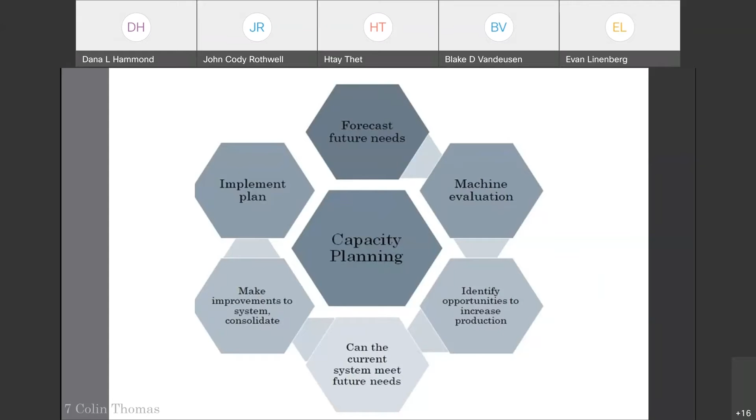So when you have that, you're able to come up with some improvements, whether that be on the engineering side, supply chain side, or operations side, to be able to meet those future demands and make sure you're meeting your customers' expectations. Once you do that, you can implement your plan into the system and allow your capacity plan to track how well those changes are helping to meet future demands.

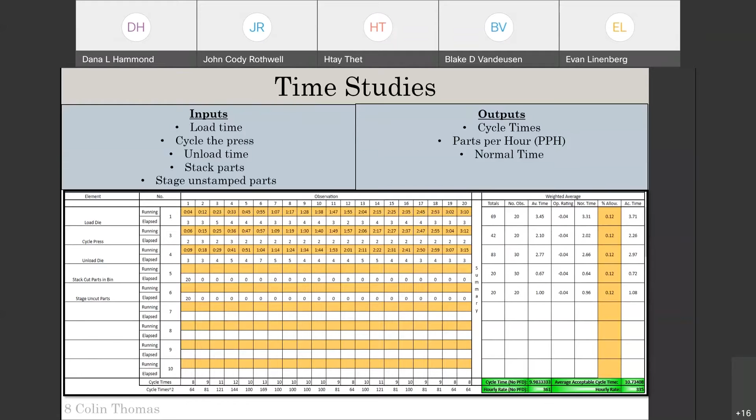So to begin building our capacity plan, we started with our data collection, which was the biggest part of our project. So we started by collecting time studies. A time study is a tool used by companies to evaluate how long it takes a machine or a person to finish a piece of work. So in our case, we were evaluating the 5 manually fed presses at Bradford White.

To get accurate times, we broke this work up into elements. These elements included manually loading the pan into the die, cycling the press, and then unloading it. These had to happen every time a finished part was completed. And then also stacking and staging of finished and non-finished goods. Those happened less frequently, so they had less impact on the overall cycle time.

So once these were broken into elements, we collected times with stopwatches and videotapes. These were plugged into our time study table as shown right here. And this gave us a good look into how long it took to complete each element. Since these are manually driven operations, this was very important. We also incorporated operator ratings and percentage allowances for the work environment and how hard the operation was to complete.

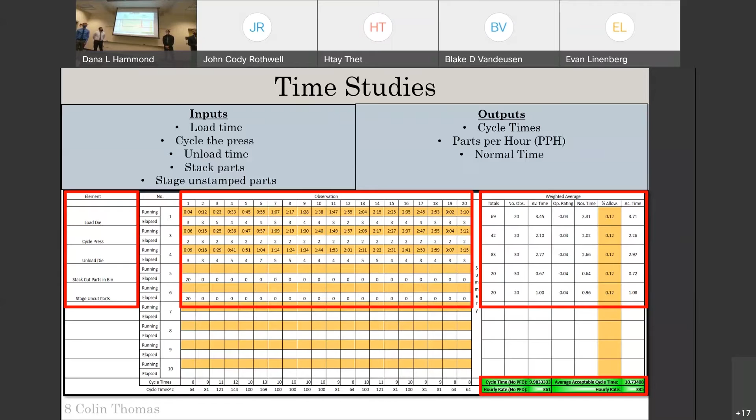So once all this was plugged into our tool, we were able to get cycle times and hourly rates for the over 100 parts that get run on 5 presses that we're looking at. More data that we need to collect.

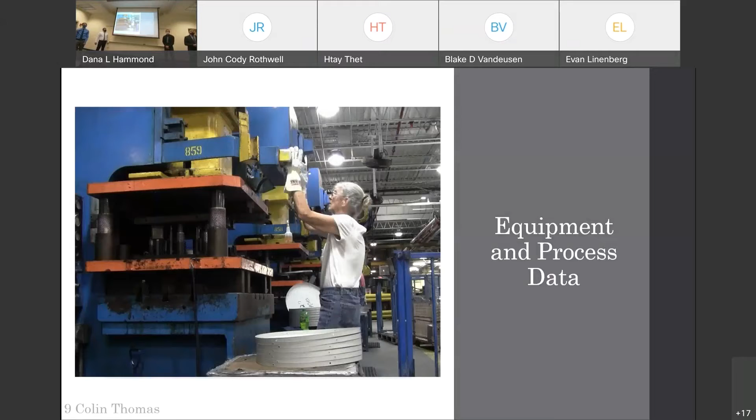Started off with some critical machine information. This is a picture of the manually fed presses that we're looking at. We had to collect data on the size of the machine, what dies can be run in the machine, and how many strokes per year the machine sees.

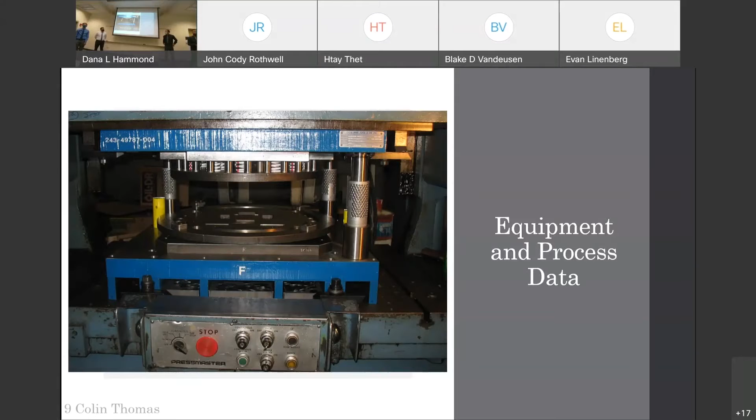And when we refer to tooling, we're talking about die sets like these ones right here. For the tooling, we had to collect the size of the tool, where the tool can be used, and what parts come out of each die set we had to look at.

We also had to look at how many people were available to run these presses. So Bradford White runs a 3-shift operation in their stamping department. On first shift, there's only 3 people available to run these 5 presses. This means that only 3 out of the 5 presses can run at one time.

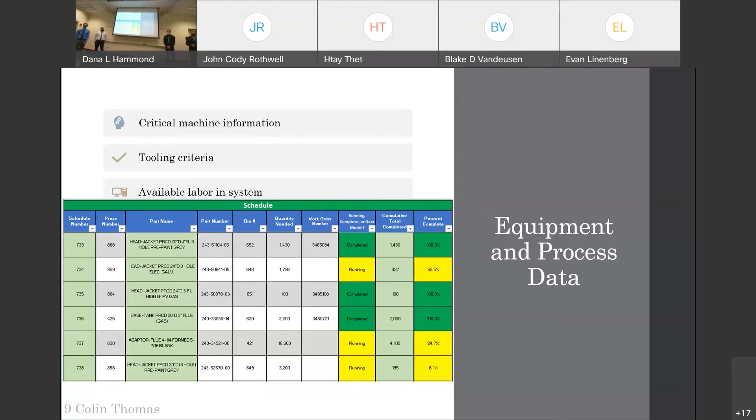Nick will mention this later, but as most of you know, finding labor in this environment is fairly hard. Second shift and third shift only have 2 operators available to run these presses. So we had to dig into old schedules and old production reports to see how well they were able to meet the needs of their schedule and how fast they were able to run certain parts.

For our capacity plan, we used the 2020 volumes seen by Bradford White, but we also forecasted into the future for growing demands to be able to evaluate if our systems could meet our growing demands.

We also obtained quotes from outside manufacturers when we started to look into outside processing, or OSP. OSP is when one manufacturing company has another manufacturing company make parts for them and bring them back to them for final assembly. So we got quotes from other suppliers for that.

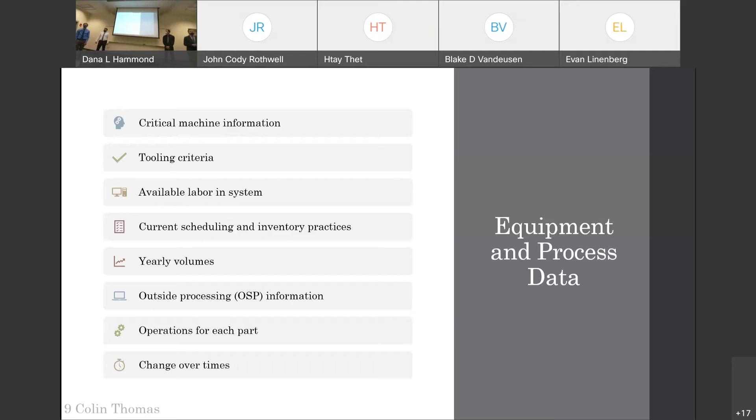We also looked into operations that it took to complete a head and base pan. These head and base pans may look simple, but some of them take up to 5 different stamps in a press to be able to use as a finished part. So that all played a role in how long it takes for a finished head or base pan to be completed.

So with all this data, we really needed a way to organize it so that our team could use it. So we built a matrix Excel tool to be able to filter and organize this data as we needed it. It also allowed for greater visibility as we started looking at improvements that we could make as we started to build our capacity plan outline.

This matrix is being used by engineers at Bradford White currently to work on other projects, as the manufacturing standards involved are very helpful. So as we start to put together our capacity plan outline, we spent a lot of time doing research on what other companies are doing, how it's being helpful to them, and how we can form it into the unique system that we're looking at at Bradford White.

So to begin that, we gave press and die assignments for each part to be able to organize it that way. And then we brought our capacity plan outline to Tim Cross at Bradford White for them to evaluate it. Tim suggested that we start to look at targeting an 80% utilization across all 5 presses. 80% seems low, but there's a few reasons that we do this.

It's because of emergency changes at the assembly lines. If we need to change our schedule in the press room, it gives us extra capacity to be able to meet those demands. And then also the 11th hour customer: if we have a customer come to us late that needs parts now, in 21st century manufacturing that's very important, and we need to meet those customer demands. Now I'll give it to Nick to talk more about our utilization rates.

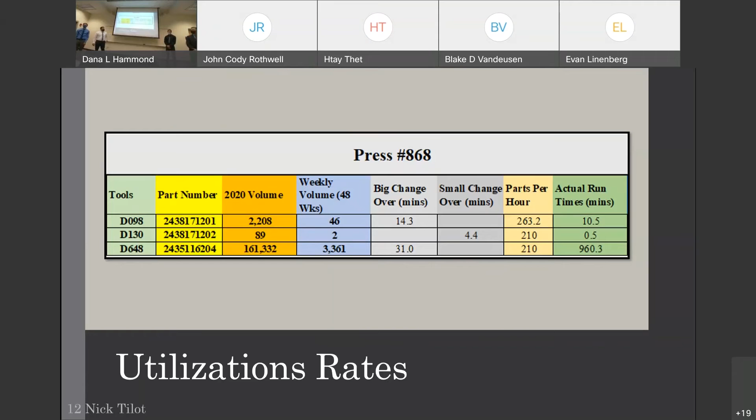We use this data to start calculating our utilizations. The first equation we had to use was the available runtime. This is the number of operators multiplied by the available runtime per operator divided by the number of presses that were in use at the time.

We then use this to solve for the utilization rate. This was the weekly volume divided by the cycle time, plus the changeover time and preventative maintenance. This is all then divided by the available runtime. We use these equations to find the current rate at which Bradford White was currently at.

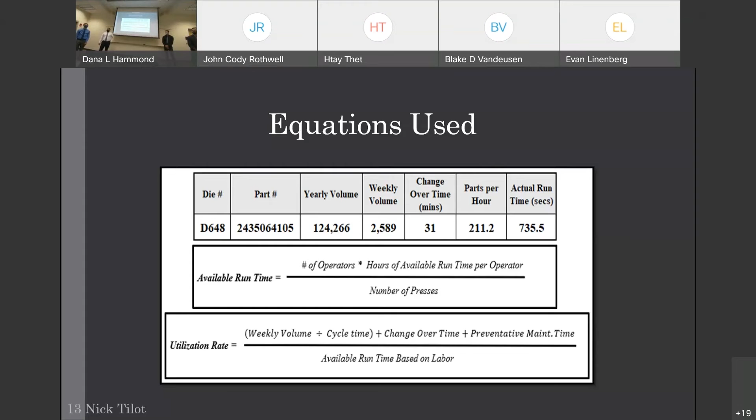On this slide, you can see the current state of the press utilization. We did this by using the primary presses given to us by Bradford White. We found a 115% average utilization, which normally could be lowered by adding labor, but in this instance, we are not allowed to do that because of the tough times with labor shortages.

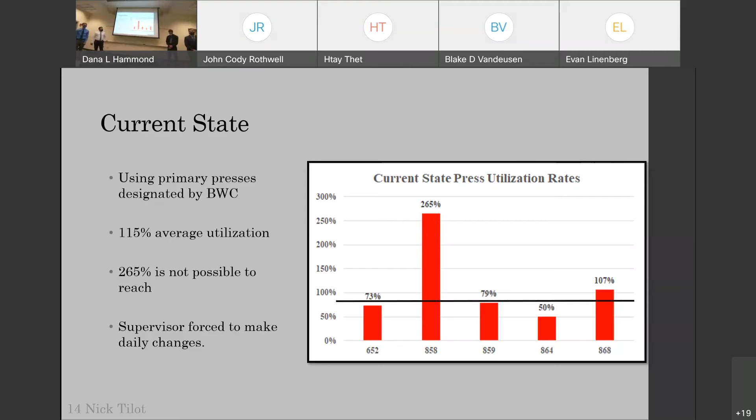As you can see, press 858 has a 265% utilization. This number isn't possible to reach, so we reached out to Bradford White to see how this could be possible. We found that the supervisor spends an hour of his day every day spreading out the volumes across the 5 presses to make sure that they can run smoothly. So when we heard this, we decided to make scheduling changes to fix this.

The first thing we wanted to do was rearrange the press assignment. So we had to go through all of the dies to make sure which dies could fit on what presses. And what we found was that almost all dies could fit on any of the 5 presses. So this was an easy fix. The next step was working on labor allocation changes. What we did was focus on the overutilized presses and add more available runtime to drive down the utilization.

The next fix was to work on reducing changeovers. The first thing we did was to group similar parts so we were allowed to keep the same die in the press without having to change it out. The next thing we did was set a rule of 100 part minimum runs. This would make sure we didn't have any small batch sizes, to also decrease changeovers. And the final step was to make sure we ran all of the operations for one part in a row before moving on to the next part. And the last scheduling change we had was to look into outsourcing options.

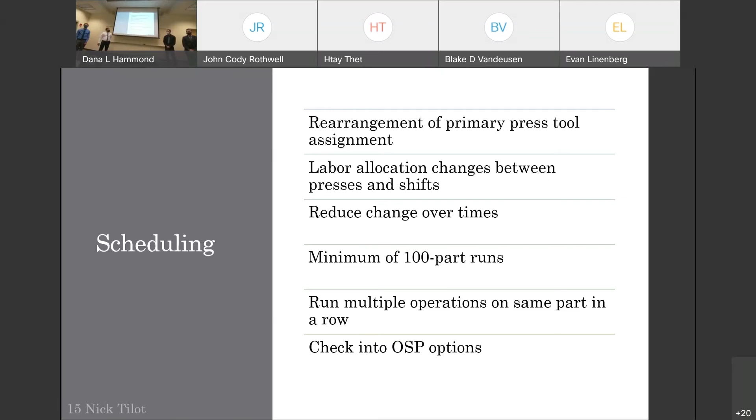We decided to outsource die 412 and die 413 because they make very similar parts. They make the exact amount of volume we need to reduce to reach the mark that we would like to meet. With this happening, we would have a reduction in production of about 11.5%, which gives us a 79% average utilization across the presses. We used a make-buy analysis to see if it's worth making these parts on overtime or just outsourcing, and we found it is cheaper to outsource the products.

And these are our final recommendations for the capacity plan and also the scheduling, and I'll have Keegan talk to you more about inventory. The next area we looked at was inventory management. Everything pertaining to this is all recommendations we've made for Bradford White. And to best manage inventory, the big things you need is organization and accessibility.

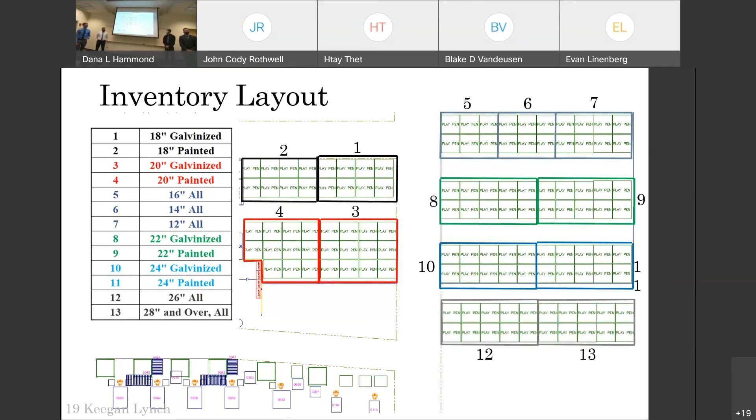We estimate that we can reduce the press utilization by 35% and reduce the volume that they output by 12%. Overall, we added it together and we estimate that we can save Bradford White $82,000 yearly with our plan. We broke our conclusion and recommendations into two separate categories. The first pertains to the capacity plan and scheduling, and the second category pertains to the inventory.

So first, we recommend grouping the part numbers based off of the tooling, creating parts, and assigning each die to a press. This will help streamline the manufacturing process. Next, we recommend having runtime parts running for at least 100 parts per run. And we estimate this will increase the run times and decrease the changeover times. Finally, we recommend that they outsource some parts, so the utilization rates aren't as high as they have been. For inventory, we recommend creating labeled sections for each inventory type on the floor, as well as introducing new barcodes and labels to storage areas.

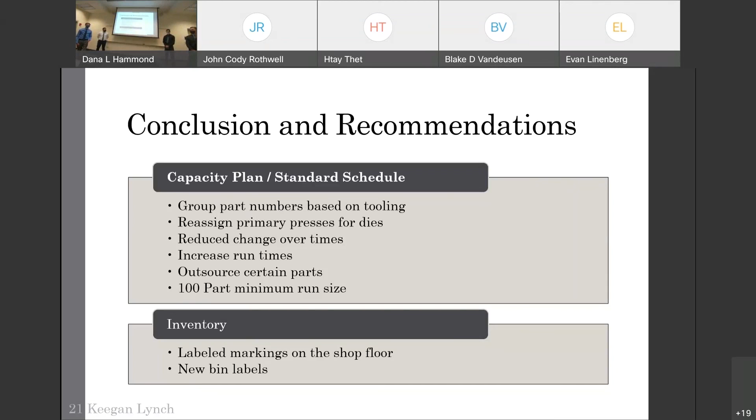We'd like to take any questions you have right now. Any questions from the room? Has your plan been implemented or in the process of being implemented? Yes, I actually sent the plan 2 days ago to our master scheduler, and he's starting to use it.

Very good. I have a question. You may not know the answer to this, but that's all right. On average, what is the reduction in number of changeovers with your plan? So with our set weekly schedule right now, I think it's going to go down from an average of 5 to 7 changeovers per shift to around 2 or 3. On the average of all 5? Yep. Thank you.

Anything else in the room? Yeah, something I wanted to ask. So you said that your group gave that capacity plan to Bradford White. I think they may be attending, but we have not done the presentation directly to them. But the project would save $82,000, they just trusted it? No, we had met with them probably 4 or 5 times throughout the project, and then we showed them our presentation and our final capacity plan for them to look over.